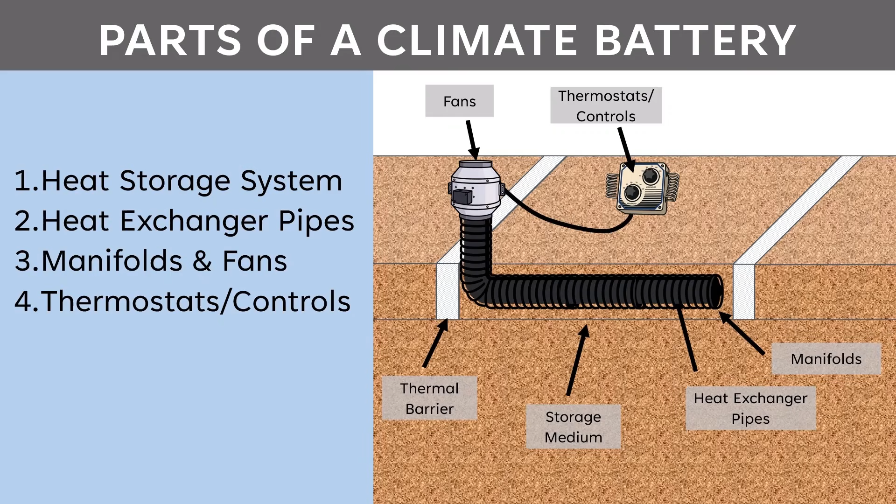In this video, I'm going to discuss just the heat storage system of a climate battery. That means I'm going to focus on the storage medium itself and the insulation or thermal barrier that holds the heat into that storage medium. Warning: small amounts of math may be included.

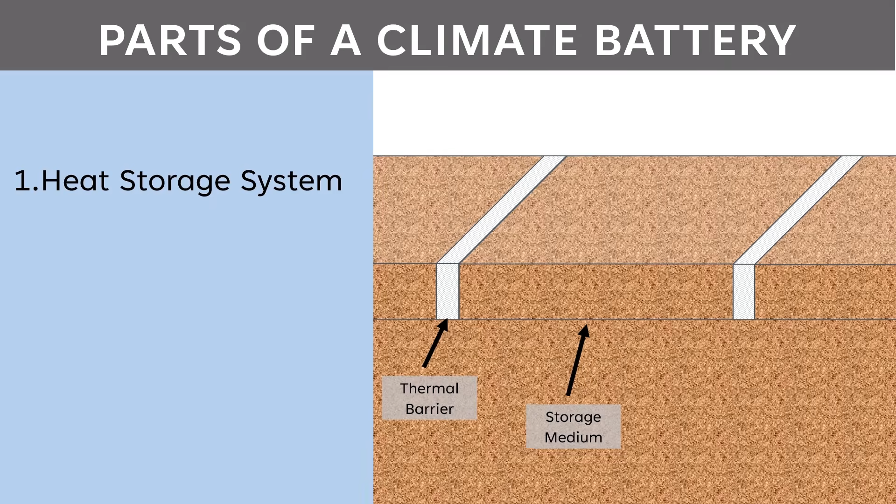Let's look at the most common options available for the below ground thermal mass and their most basic characteristic: heat storage density. Heat storage density tells you how much heat a material can pack in before it warms up by 1 degree. These are all measured per cubic foot of material. First up, we have air, which has a very tiny number. This is why when the sun hits our greenhouses, they heat up very quickly, and then they cool off very rapidly when the sun sets.

Next up, we have dry clay, loam, sand, and gravel. Each one of these holds a little bit less heat than the other. For reference, here's where concrete sits in that lineup. It's not really a choice for a climate battery, but it's included for comparison's sake.

However, most of us are going to water our plants and want to keep the soil moist. That's actually a great thing for our climate battery. We aren't using dry materials, we're going to keep them moist. Of course our plants don't like swimming, but if they did, here's where pure water sits on the storage scale, which is nice for relative comparisons.

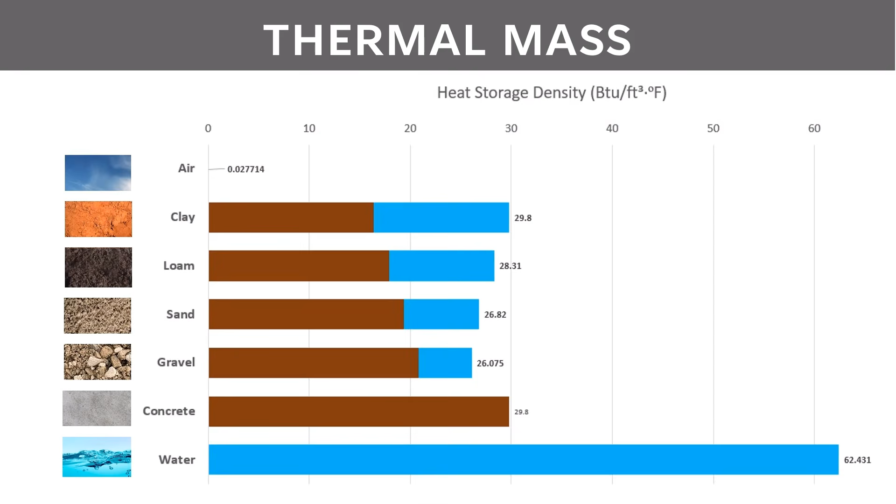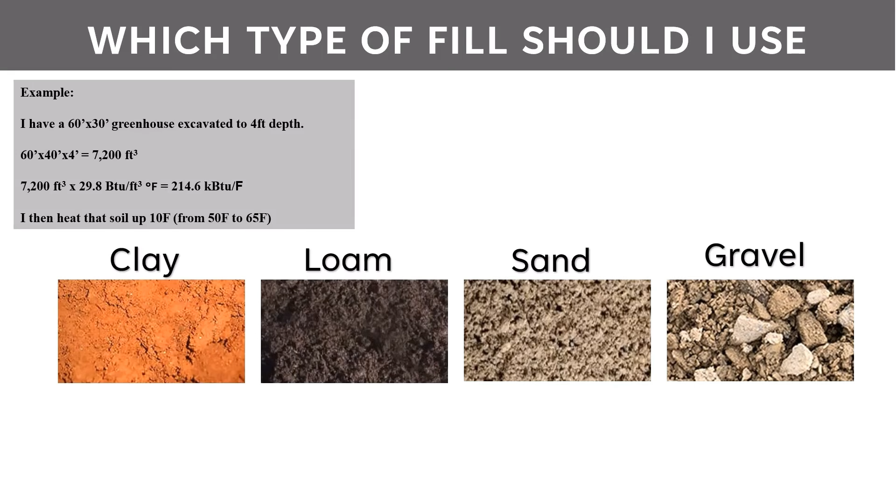With this background, let's move on. One of the most common questions I get is what kind of fill should I use for my climate battery? The most common options people have are clay, loam, sand, or gravel. Let's do some math. For example, I have a 60 by 30 foot greenhouse, and I'm going to excavate 4 foot down, so I have 7,200 cubic foot of storage space. We can multiply that times the material properties on the previous page, and voila.

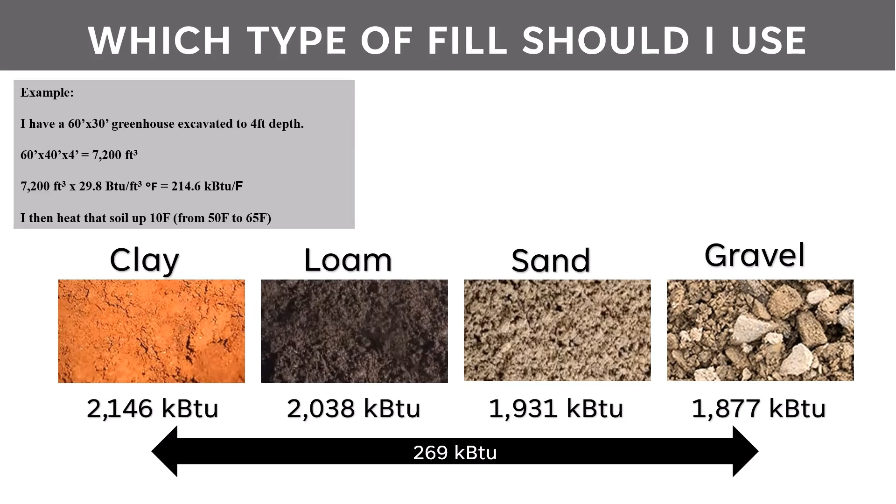If we look at the difference from most to least, we get 269 kilobtu. But how much is that? A typical 20-pound propane tank for your grill is 433 kilobtu, so that's about 2/3 of a propane tank. Not a lot for what the cost of bringing in fill might be.

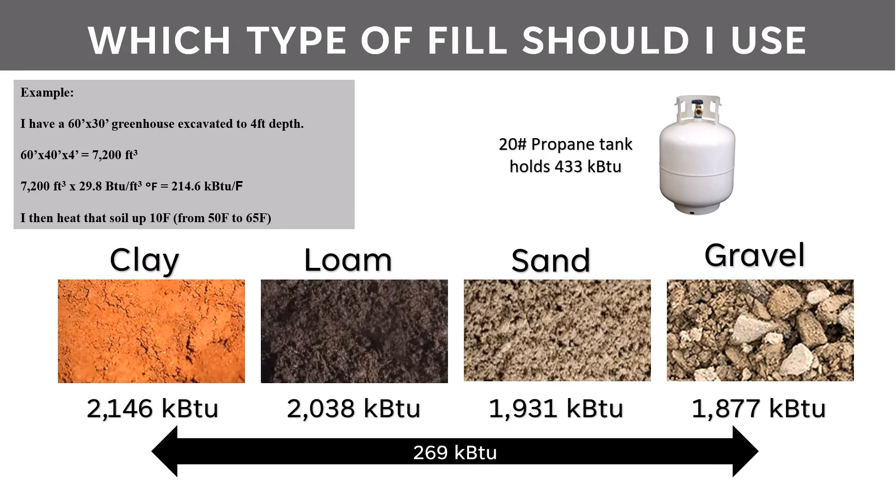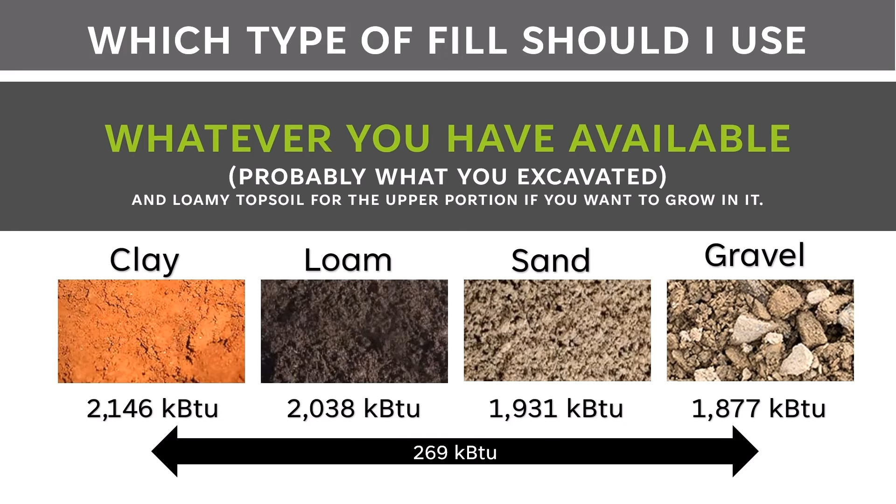So the best option is whatever you have available, which is probably what you just excavated. You do want to have nice loamy soil on top if you're planning to grow in it, and watering your plants will help keep the climate battery moist and at maximum storage capacity.

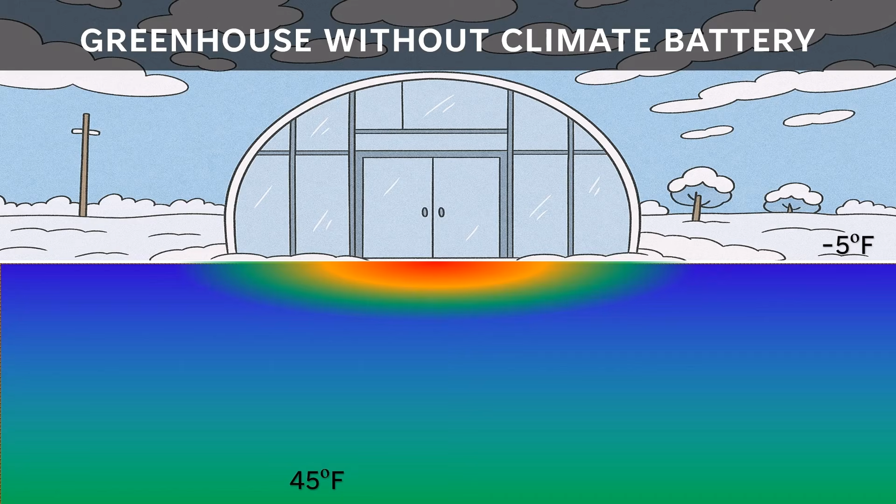In a high tunnel or greenhouse without a climate battery and insulation, the daily heat captured will slowly conduct into the ground, and then it will start to dissipate. If we add a climate battery to store that heat, we need to reduce the loss of heat to the surrounding earth, so some insulation is required. Otherwise, it isn't really a battery.

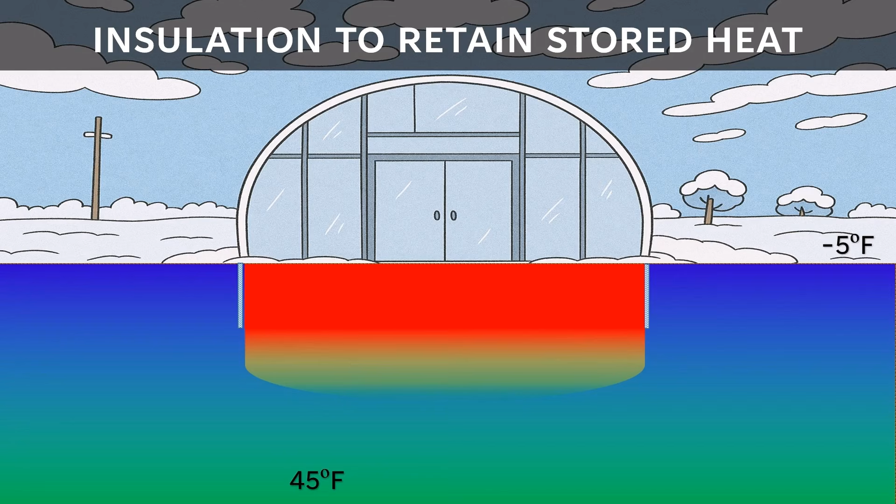So now we're going to add some insulation right below the structure. That changes the heat path so that the heat we capture and store in a high tunnel or greenhouse goes into the ground right below the structure and is held and stored in place until it gradually fades into the ambient ground temperature that's a little bit warmer deeper down below the ground.

I previously did several studies using the software tool called Therm that allows an engineer to model two-dimensional heat losses. All of these scenarios assume that the climate battery soil is at 70 degrees Fahrenheit, which is about the typical level that I achieve going into the cold season. First, I compared 3 scenarios: no insulation, 2 inches of XPS or extruded polystyrene, and 4 inches of XPS. I included the material cost per linear foot at the time when I built it for your reference.

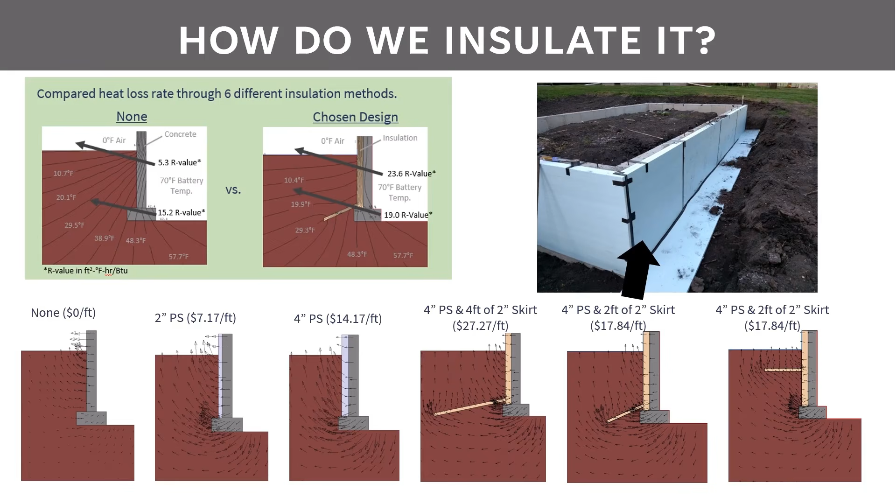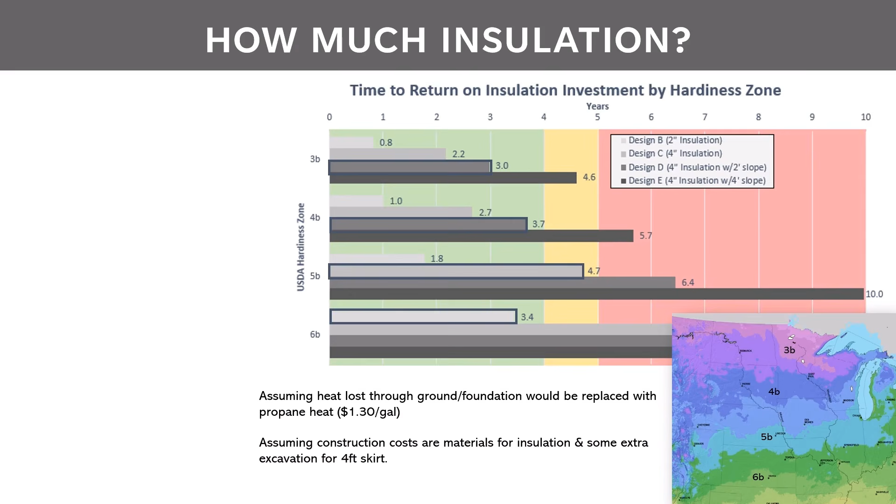Then I added options that took it even farther, utilizing a frost skirt, which further reduces the heat loss through the base of the battery, but can add substantial costs. I then utilized this information to calculate the return on investment of the various configurations at USDA hardiness zones 3B through 6B. I assumed we would have to replace the heat lost through our foundation with propane, which was costing $1.30 per gallon at the time.

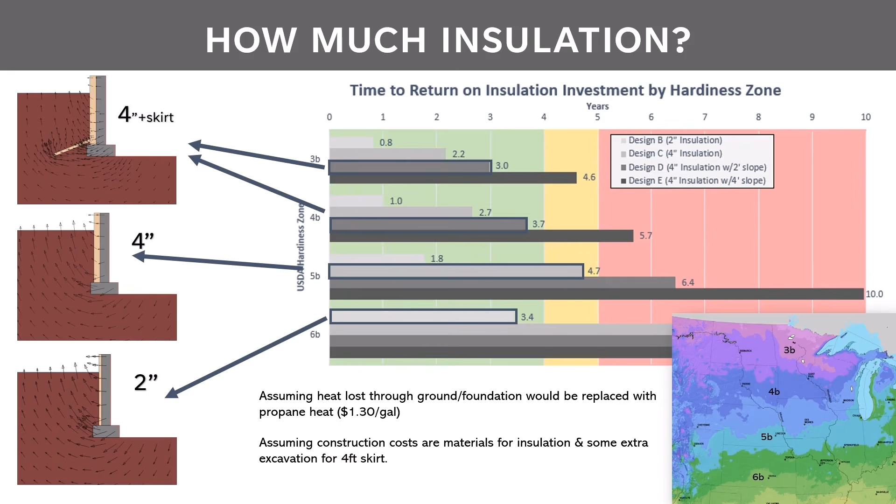So for zone 6B, no more insulation than 2 inches makes sense; we easily get an ROI within 4 years. For zone 5, 4 inches becomes viable. Colder zones, like 3 or colder, will find the frost skirt pays off. Zone 4 is kind of in the middle, and I tend to suggest doing just the single 4-inch layer without the skirt because it does add extra excavation costs and complexity to the installation.

Sometimes folks ask if they should dig deeper, maybe down to 8 foot. Maybe they have their own excavator. Building a climate battery deeper will give you more heat storage, but it radically increases all of the costs, such as tubes, manifolds, fans, and electricity to power them. The materials to fully utilize this depth may range up to $20 per square foot for your structure and are only effective if you have enough solar energy to utilize that capacity. I don't recommend the strategy. Instead, save your money to insulate the structure better.

A 4-foot depth is often the sweet spot for most applications. But what about a single layer of pipes, 2 foot deep? It does reduce the costs, however it also greatly reduces the benefits by more than half because there is less heat below the level of tubes to bring up due to its shallow depth. There are lower cost methods of getting the equivalent thermal mass than a single layer of tubes, such as solid mass concrete blocks.

An important warning for climate batteries: make sure you know the depth of your local water table. You don't want your tubes being below the water table and constantly fighting with flooded tubes.

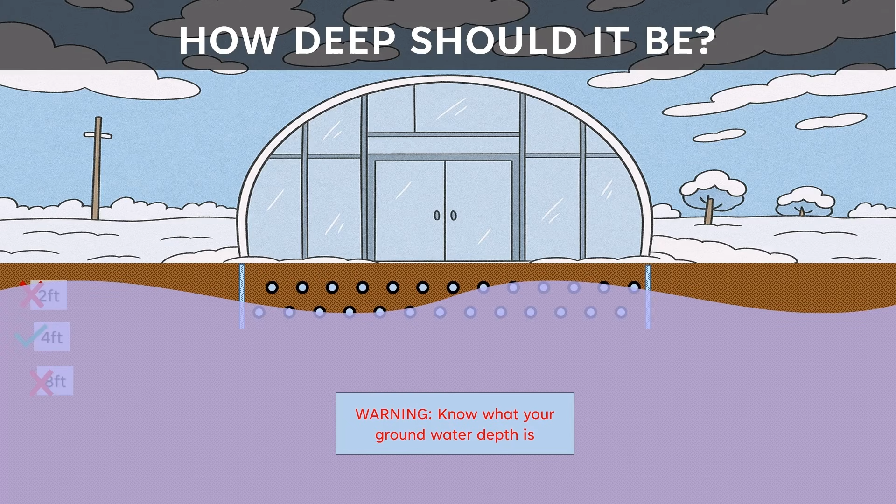Next up, I'm going to talk about the heat exchanger pipes. Should you do 4-inch? Should you do 6-inch? How long should they be? What spacing should they be? So many options, so many choices, and so many pitfalls.